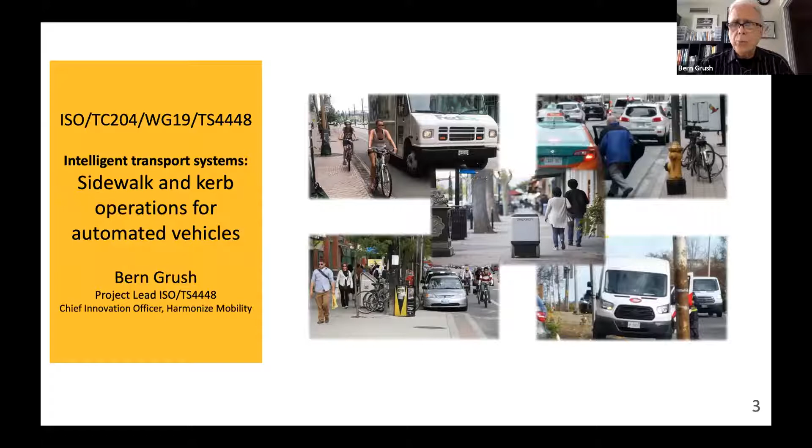That's the name of the standard on the left. It is intended to address goods delivery, passenger drop-off, robots, crowded sidewalks of all sorts of competitive issues, and also goods delivery is an important and critical part of that. So we're going to be focusing down on the center issue today, that issue of sidewalk robots, but the entire scope of those issues are all incorporated within the standard that I'll be talking about. Its name is 4448, ISO 4448.

If you think about the sidewalk and curb that we know now, it's mostly in the past. Go back a decade or more, it was really for bus stops, taxis, and parking your car. Over the past decade, we've introduced finally more cycling lanes in more cities. Bike shares are new over the past decade or so, ride hailing, e-commerce, and so on. So more and more as we've moved out, of course, just most recently because of the pandemic, alfresco dining has joined the sidewalk, and we're now expecting delivery bots and other robots to sweep and clean and maintain the sidewalk and so forth are on their way.

They're under development. They're being used in a few places in pilots and so on. But that on the right, everything circled in red, is the subset that I'll be looking at today. Keep in mind that all of this is about governance, regulation, and operation of these vehicles in those spaces.

Briefly, what's been changing, what has started to change, and what will increasingly change is the structure of urban revenue, because if we're parking less, or if we're paying fewer fines because of automated vehicles—talking about robotaxis in this case—if there's fewer traffic fines because of automation and so forth, this all impacts urban revenue. Electrification impacts provincial revenue as well, because of fuel taxes and so on.

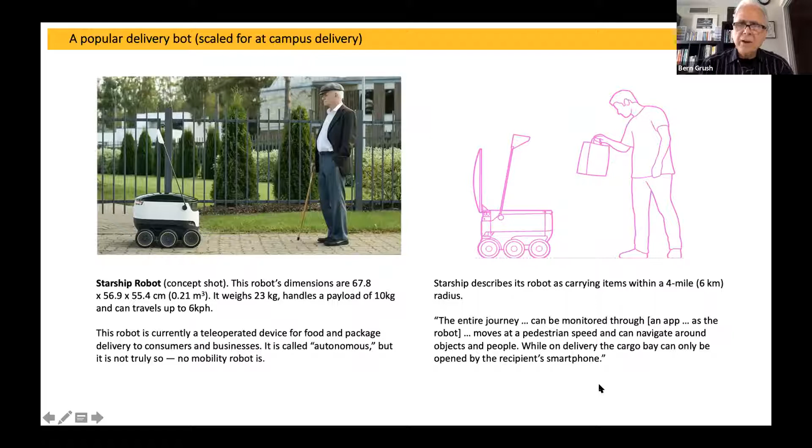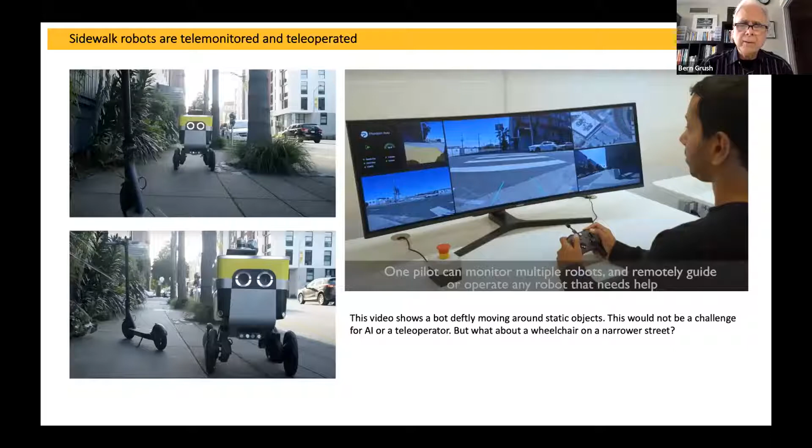And that's because more and more the machines do more and more on their own - they only need to be helped out when they're in trouble. So you can imagine an operations center with, say, 10 operators and many dozens of screens and many hundreds of vehicles being operated, shared, and swapped back and forth by these operators. That's where that technology is on the cusp of now.

So I'm going to talk a little bit about why sidewalk delivery robots - that's what's next. This is coming before robotaxis, and I'm saying these next few comments because we're going to be caught out by surprise the same way we were caught out by surprise by ride hailing and by scooters and so on. We're not prepared for this, and that's the remainder of my talk. But the next few slides are why is it that this is going to come first?

The major fundamental issue is that the barriers to deployment are far lower for these robots than they are for robotaxis, and the accelerators for deployment are far higher. So briefly, the first one is safety.

These are slow, small, so the momentum of these is so low that it would be - especially the first one I showed you - very unlikely to cause serious harm to a human. I'm not saying something couldn't go wrong. Of course, it's possible it would be a tripping hazard, for example. However, it's perceived, and in fact because of momentum actually is, a much lower crash hazard than a robotaxi would be perceived to be.

There's also no human passengers, and that's a mixed blessing, but it turns out that's another reason it would be less dangerous, and it is perceived as less dangerous. It's really the perception that matters.

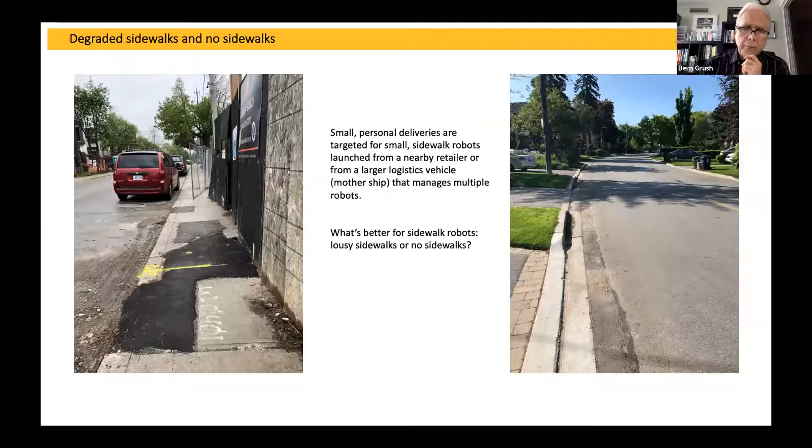So do we deny these people the ability to get deliveries using these, or do we say, okay, the robots can go on the street, for example? Certainly they could, technically, but what rules do we want to have?

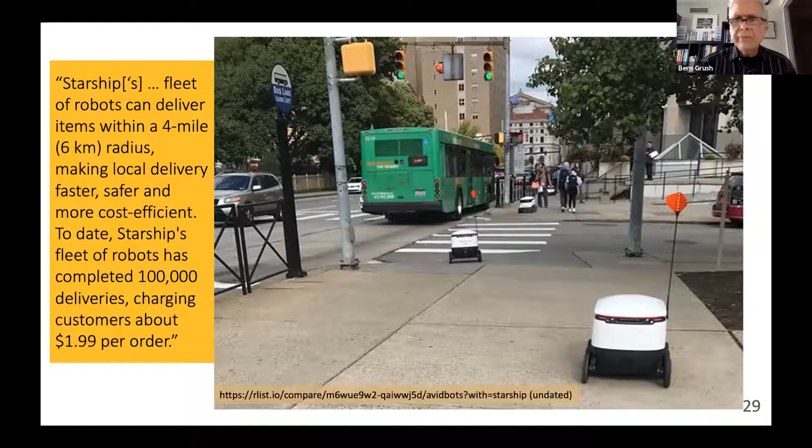So imagine, and again, we're talking about what the standard looks at, imagine having a limit over time, a dynamic limit. So at some time of the day, we allow none. At some other times of the day, we allow 3 or 6 or whatever those numbers are.

And what happens, how does a robot behave when it finds it can't pass through? How long does it have to wait? How far does it have to pull over? How much does it have to stay out of the way of pedestrians in this case? Or if there's pedestrians that are stopped and they're occupied with something, how should this robot behave?

When should it time out and go the other way around the block? When does it stop? When does it give up? Maybe these are workers doing something, maybe there is no way around - the robot would not be able to tell that and so forth. So what are all those rules and so on?

What should a robot do when there's a crowd of people? Should it just queue in behind and become one of the pedestrians and get across the street? Pennsylvania, just as I showed you earlier, said that robots are classified as pedestrians.

I think that's a mistake, but that's what they did.

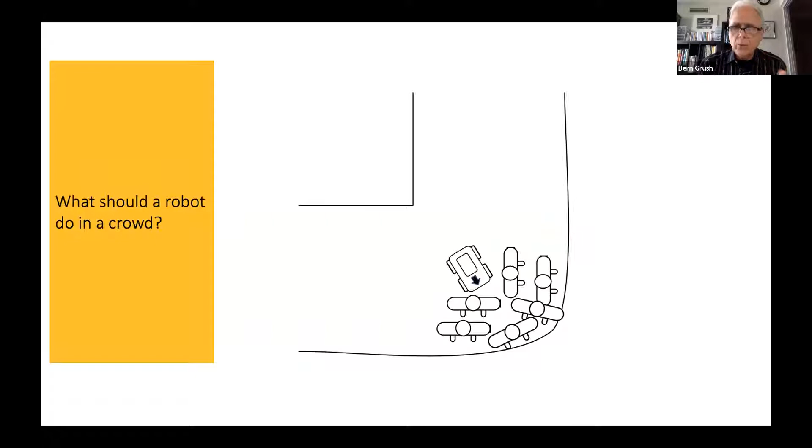Here's a pedestrian, a paraplegic woman, who was at an intersection waiting to cross when a delivery bot was crossing the street. She was waiting for the light to change, and the robot was waiting for a fresh light too, but she was coming from the opposite side. She couldn't mount the curb because the device was standing on the sloped area where she would bring her wheelchair up, and she couldn't get around it.

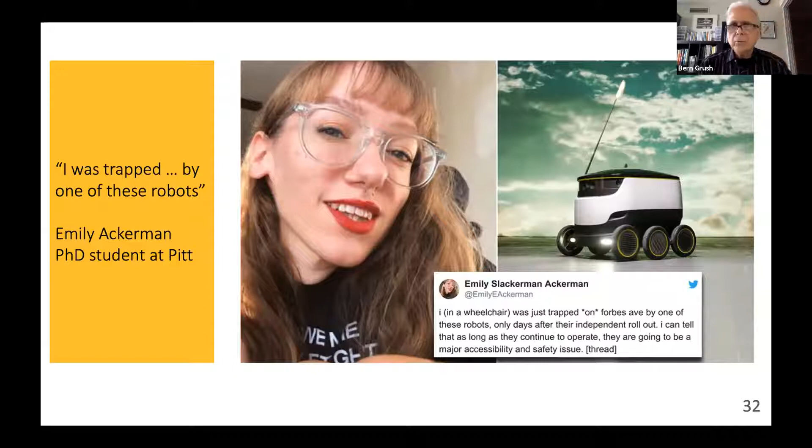You might ask, if the device was teleoperated, why didn't it back up? The easy answer is that any teleoperator needs a break. The operator came to the intersection, parked the device, and had 12 or 15 seconds to refresh his coffee, so he walked away from the screen. When he came back, the problem had already developed, and she was stranded. It was reported to the newspaper, and it shut down this operation for a while until they sorted out their procedures.

How many bots should crowd together in a single place? Again, we saw this issue of how many we'll allow on a block face, and I don't say this facetiously. This is a photograph from one of the companies.

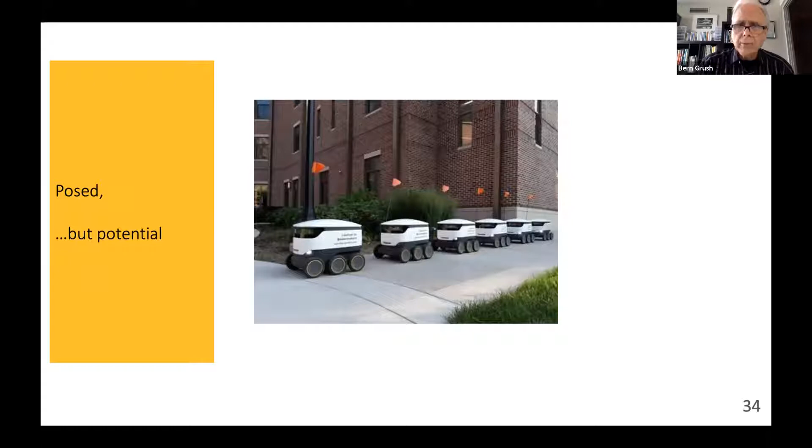It's a very real concept. The idea is that there's a lunchroom delivering all of these lunches, and it leaves the restaurant and goes off. Of course, these would all split up and go their own way. That's why they're in separate vehicles instead of one truck, since they're all going to different destinations, but at some points as they travel, they would possibly be together.

What do they do when they come to an intersection? How do they organize themselves so people can get around them? All kinds of rules are possible, but every rule has a limitation. There's only so much you can do. So how do you set those rules, different from street to street, from sidewalk to sidewalk? It's a highly dynamic problem that needs to be solved.

After you work all of that out over the next 3, 5, or 9 years, the value of a wheeled robot is still limited because of curbs, sidewalks, steps, and so forth. Ambulatory robots are almost certain to play a larger role as time goes on.

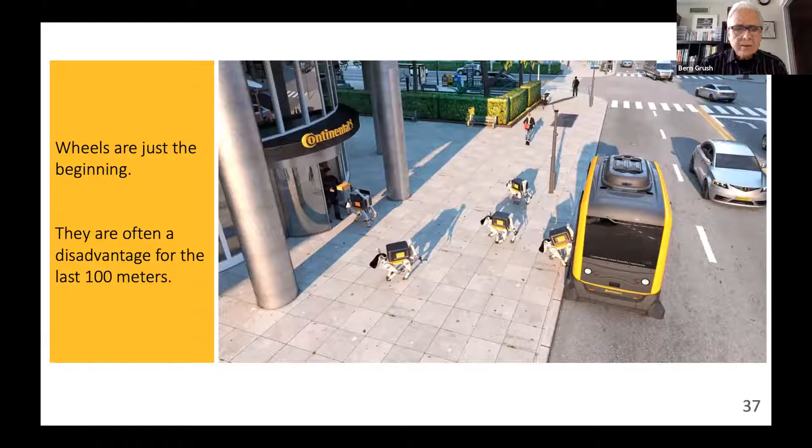I'm talking about local personal deliveries, not large goods movements. The idea here is that a vehicle holding 4 or 6 robots with lots of goods goes somewhere and ejects 3 or 5 robots to deliver within, say, a kilometer or half-kilometer radius. Very interesting ideas, but lots of barriers to this.

What about snow plows? Many people are developing snow plows. This is a robot for sidewalk inspection during the summer, and during the winter that same robot plows snow. Talk about versatility, it's very interesting.

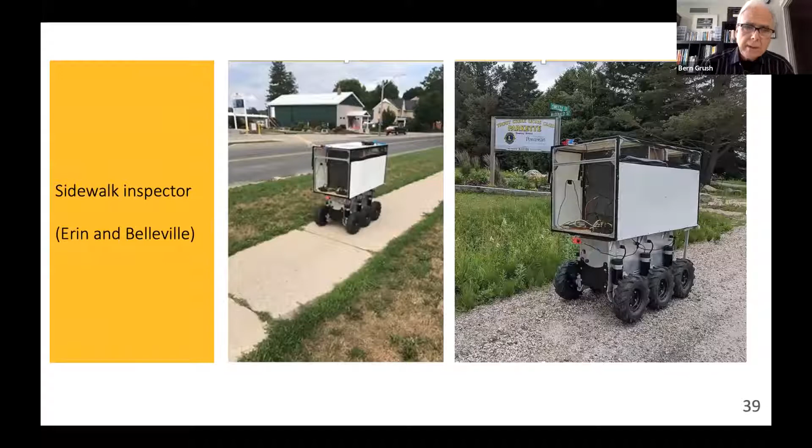You can see the operator, the fellow in the red vest, is the teleoperator of that vehicle, the same person who operates these others. He's just not usually in the picture, because we'd like to believe they're autonomous in the sense that there are no humans around, but there are humans around, watching and guiding.

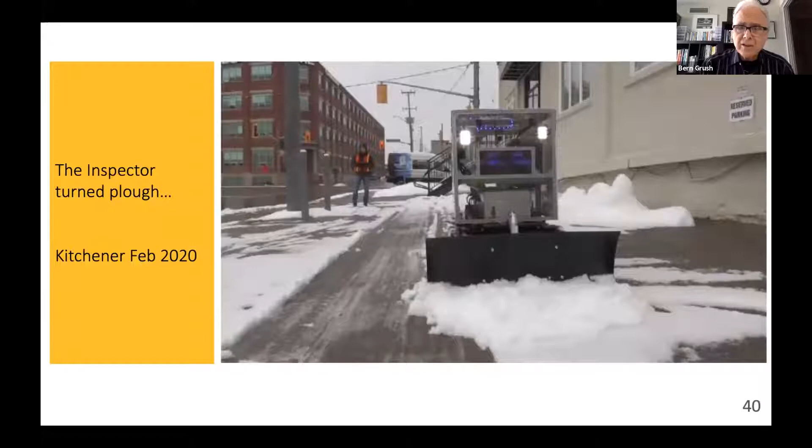This is line of sight teleoperation. I'm going to talk in a minute about line of sight versus non-line of sight. The earlier example I showed you, where the person was at a desk, was distant. That's non-line of sight teleoperation.

So here's the point: whether teleoperated or autonomous, it doesn't matter. It doesn't matter what they're doing, delivering, sweeping, cleaning, or inspecting. It doesn't matter whether they're on the sidewalk, a bicycle path, or in the road. It doesn't matter whether they have wheels or feet. These things are here, they're starting.

Because they're teleoperated, we don't need to wait for any new AI. We want that AI to lower the cost of operating them, but that doesn't prevent them from being operated now. One of the first bots I showed you is already making deliveries for $2. I suppose that's break-even because they're looking for business, or it might even be a minor loss, but it's still already less expensive than bicycle couriers, for example.

So what does ISO 4448 claim to do?

It claims to manage all sorts of things like sizes, weights, and speeds, and it doesn't constrain them. What it provides is the language for a vehicle to say, here is my size, weight, and speed, and the language for a city to say, here is the size, weight, and speeds that we permit on this geography or this street, and so forth.

In other words, it's the data specifications that allow governance to be in the cloud, so that a fleet operator can ask the cloud, I need to send a robot from this place to this place, therefore I need to cross these four.

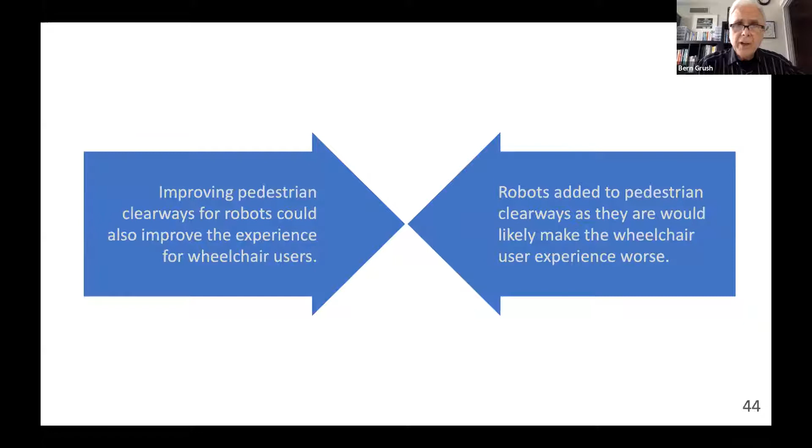However, in my opinion, if you simply add robots to pedestrian clearways as they are—I showed you many examples—we just put robots in those places, I think we're going to make them worse for everybody. We're going to make them worse for you walking your dog, and we're going to make it worse for you if you're using a wheelchair. So I think we have a possible win, and we have a possible risk there as well.

Okay, I just have a couple more slides left. I want to show you some very critical work called maturity models. So here are the questions. Imagine a municipality says, or someone says, a business district says, what level of automation can we permit at this particular block face where I operate, where my customers are, where I am, or maybe a certain downtown area? What ought we to be able to permit here?

The second question is, we really want to permit a certain kind of automation. We really want to have teleoperated, non-line of sight vehicles that come here to support our business and to do our deliveries. And so we're asking the city to invest. So what does the city have to do given a certain level of desired automation?

They're just the same question asked in reverse - this is the as-is question, or the 'I'm ready to invest' question. So what we've done is define a set of classes of blocks, classes of capability of the sidewalk, and what capabilities and features that sidewalk has to have in order to permit a certain level of automation. Given that, we can define the readiness of each block face, or say here's what you need to do to upgrade to the readiness you'd like to have.

I also want to point out that the Kerb - that's the European spelling, by the way, if you're used to CURB - the Kerb and the sidewalk are assessed independently. The reason is, you may have a Kerb where they say we want automated taxis and automated goods trucks, but the sidewalk, we're not concerned about that, we're not going to permit sidewalk robots. Or conversely, you can have block faces where we're permitting sidewalk bots but not robo-taxis yet. So that's why they're assessed independently.

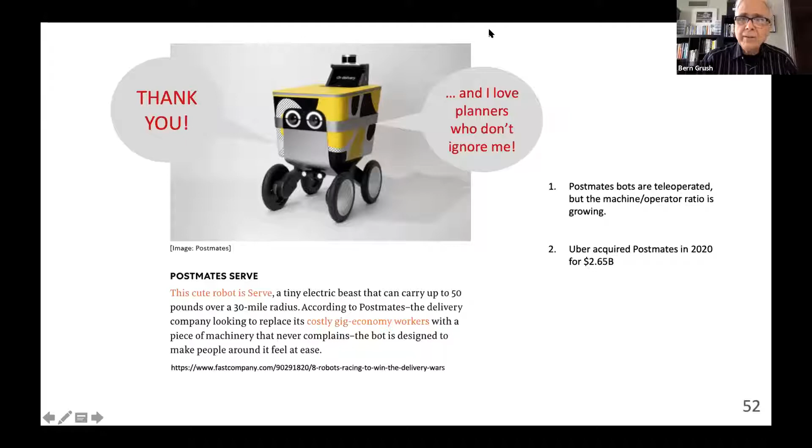Perfect, Bern, your timing is impeccable. We do have a handful of questions, let's try and get through them. First question: great presentation, Bern, very insightful as to the current challenges and complexities around kerb utilization. From a municipality's perspective, what would you see as the first steps a city should be reviewing to prepare for or consider this whole area of sidewalk as a service? Also, any municipalities or existing cities that have crossed some of those hurdles into bylaws or ordinances to inform learnings?

Well, first of all, I invite that questioner, if they're with a municipality, to join our effort. But I'll answer the second part: I mentioned that San Francisco has taken a look, rejected it, and returned to them. Washington, D.C. is probably, in North America, I would say, has done more work than any. Most of the other work has been done on campuses, and I'm afraid the campus experience, while interesting, is not a municipal experience, it's not enough. So I can introduce that questioner to somebody in Washington, D.C. to get their experience. I think that will be very valuable.

But I also invite that person to reach back to us and join the round table that we organize amongst municipalities to help get their feet into this standard. That would feed back to those parties a lot of ideas and a lot of information. Very helpful to that questioner.